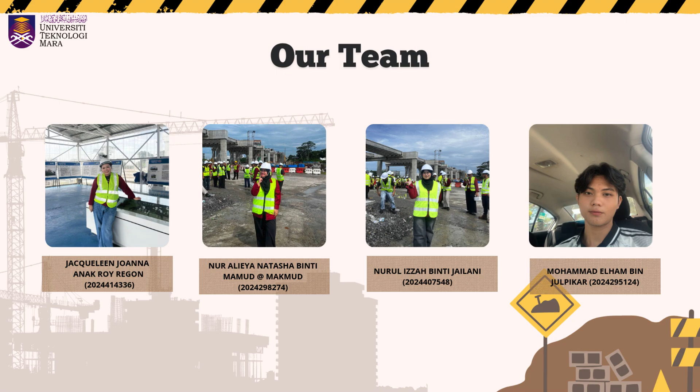Today, I will be presenting about the introduction of contiguous bored pile wall. Contiguous bored pile wall is a type of retaining wall system used to support soil during deep excavations. It is constructed by installing a series of reinforced concrete bored piles with small gaps between them. These piles are placed close together so they act as a continuous wall that retains the surrounding soil.

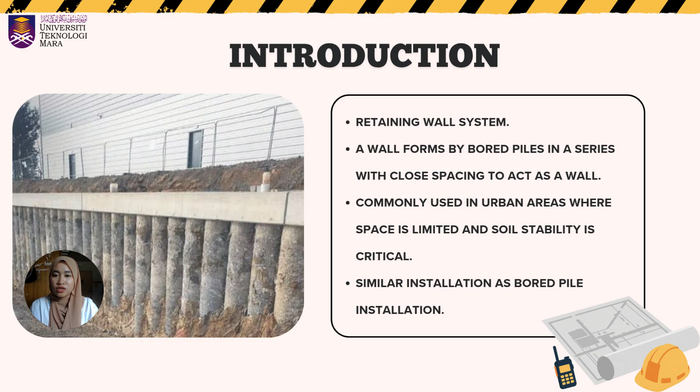This retaining system is commonly used in urban construction projects where space is limited, and it is important to protect nearby buildings, roads, and underground utilities. Compared to other retaining systems, contiguous bored pile walls produce less noise and vibration during construction, making them suitable for built-up areas. The installation process is similar to that of standard bored piles. For example, these contiguous bored pile walls are commonly used for basement construction and other deep excavation.

Next, I will explain the purpose and function of contiguous bored pile walls. The first function is to control ground movement and groundwater ingress. During deep excavation, the wall helps prevent the surrounding soil from collapsing or shifting into the excavation area. It also reduces groundwater entering the site, although it is not completely waterproof because there are small gaps between the piles. The second function is to protect nearby buildings and structures. By limiting soil movement, the wall reduces the risk of settlement or damage to nearby roads, buildings, and underground utilities. This is especially important in crowded urban areas.

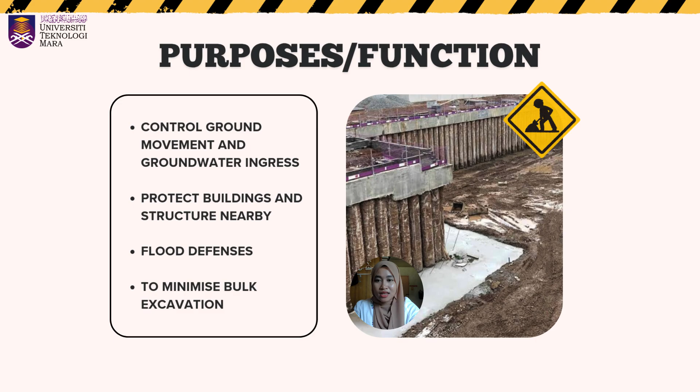Another function is flood defense. In some projects, contiguous bored pile walls are used to strengthen riverbanks or protect excavation sites from water, helping to reduce the risk of flooding and soil erosion. Finally, it helps minimize bulk excavation. Since the wall supports the surrounding soil during excavation, less earth needs to be removed or temporarily supported. This makes construction safer, faster, and more efficient.

Hi, my name is Nurul Izzah binti Jalani and I will be presenting about the method of construction for contiguous bored pile (CBP) wall. This method is commonly used for deep excavation and basement construction to provide strong earth retaining support. I will explain the process step by step from site setting out until excavation works. Step 1. Site setting out. First, the site is prepared and the wall alignment is marked according to the design drawings. Surveying equipment is used to ensure accurate positioning of each pile.

Step 2. Drilling or boring. Next, a rotary drilling rig is used to drill holes into the ground. These boreholes are constructed to the required depth and diameter based on the design specifications. Step 3. Temporary casing. Then a steel casing is inserted into the unstable soil conditions. This is to prevent the sides of the borehole from collapsing during the drilling works. Step 4. Reinforcement cage installation. After that, a reinforcement cage is lowered into the borehole. This steel cage provides structural strength and helps the pile resist lateral earth pressure and bending force.

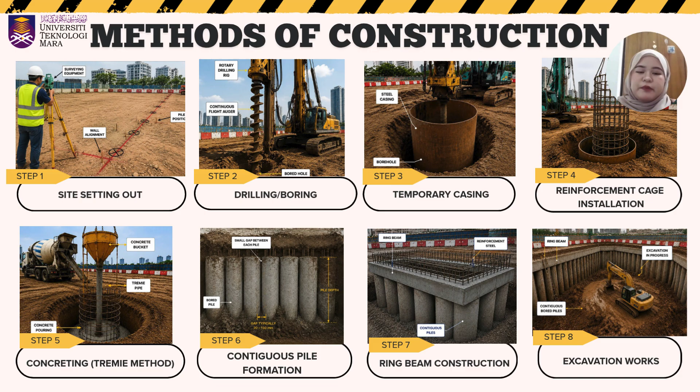Step 8. Excavation works. Finally, excavation is carried out inside the CBP wall to the required depth. The wall acts as a retaining structure to support soil and prevent collapse during basement construction. Let's move into the advantages of this piling method. First, we have no material wastage because we can cast the pile to the exact length required directly on site, and it completely eliminates the extra step and waste of cutting down pile heads after installation. Second, this approach significantly reduces ground movement. It keeps the surrounding soil stable during installation, which heavily cuts down the risk of structural damage to nearby buildings, adjacent roads, and critical underground utilities.

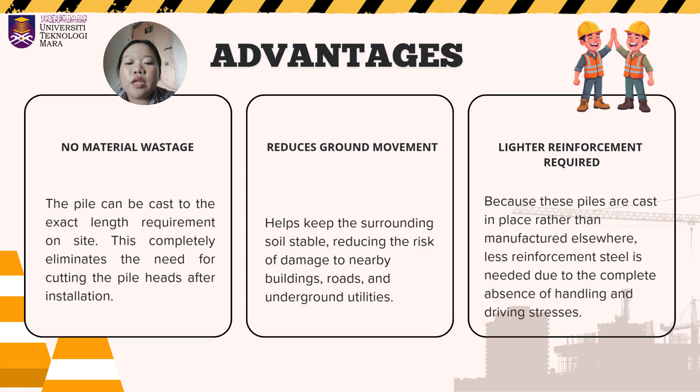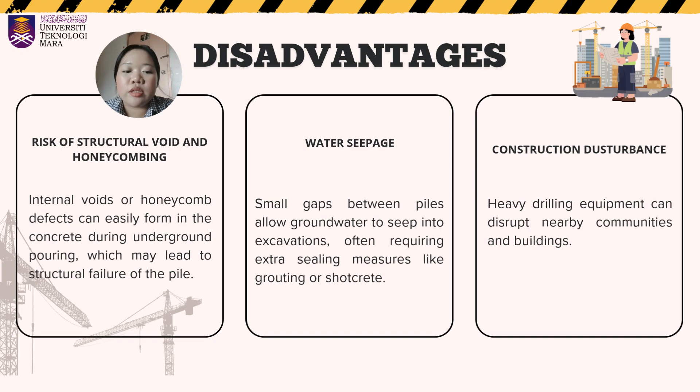Finally, lighter reinforcement is required. Since these piles are cast in place rather than manufactured at a plant and transported, they don't undergo any handling or driving stresses. This means we can use less reinforcement steel overall. Now, let's look at the disadvantages of this piling method. First, there is a risk of structural voids and honeycombing. Because the concrete is poured underground, internal voids or honeycomb defects can easily form out of sight. If left unaddressed, these flaws can compromise the structural integrity and potentially lead to a structural failure of the pile.

Hello everyone. So I will be continuing the presentation about the disadvantages of contiguous bored pile walls. Second one, water seepage. Small gaps between piles allow groundwater to seep into the excavation. This often requires extra sealing measures such as grouting or shotcrete to maintain stability. Lastly, construction disturbance. Heavy drilling equipment can cause disturbance to nearby communities and buildings, which needs careful planning and mitigation.

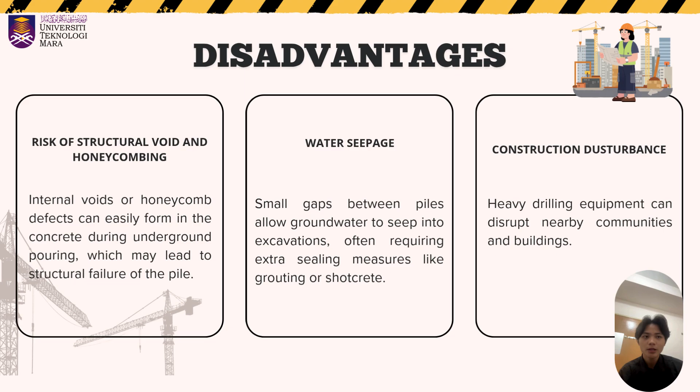So, in conclusion, contiguous bored pile walls remain a practical and cost-effective solution for basement construction. They provide reliable soil retention and structural support. However, success depends on careful management of water seepage and minimizing construction disturbance. With proper planning, these walls can deliver both safety and efficiency in challenging ground conditions.